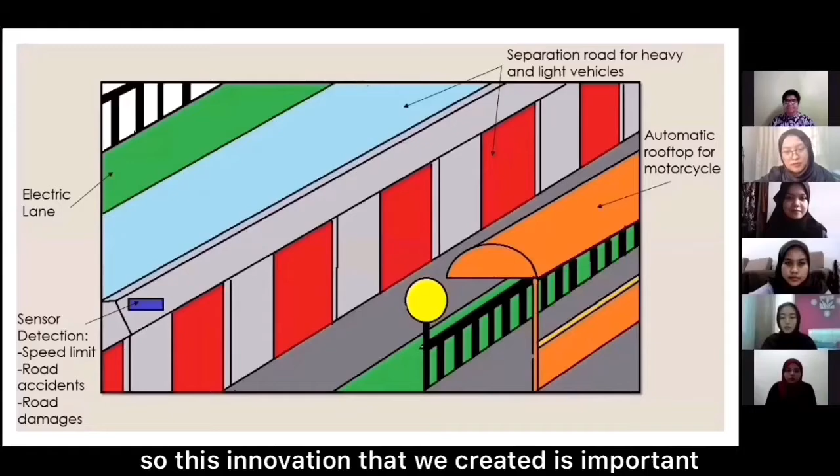Next I'm going to share the slideshow we have made for the innovation, the Innovative Technological Highway System, ITHS. This innovation is important for the future of mobility in Malaysia, focusing on improvement for the highway system.

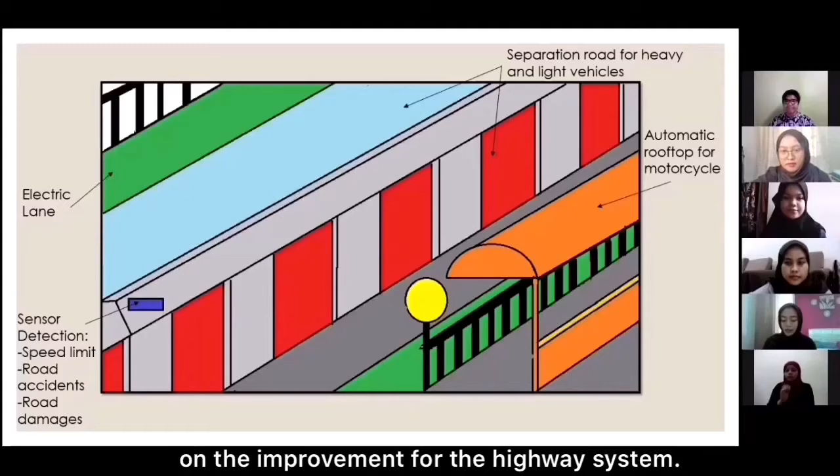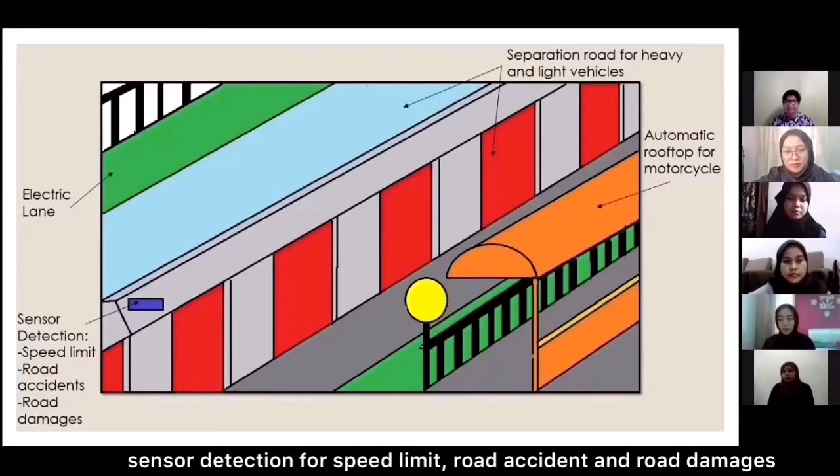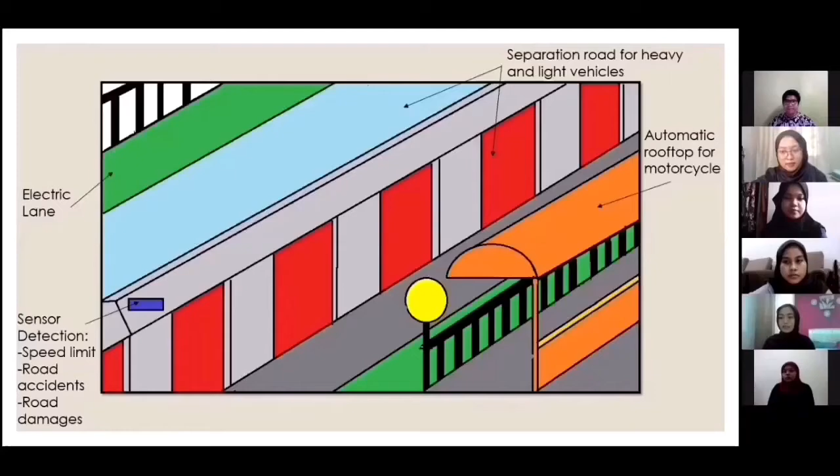We made improvements and innovations in the highway system. There are 6 parts of the highway system that we focused on for the innovation: electric lane, sensor detection for speed limit, road accident and road damage detection, automatic rooftop for motorcycles, and separation lane for heavy and light vehicles. The electric car lane is a route where drivers can charge their car while on their way to their destination.

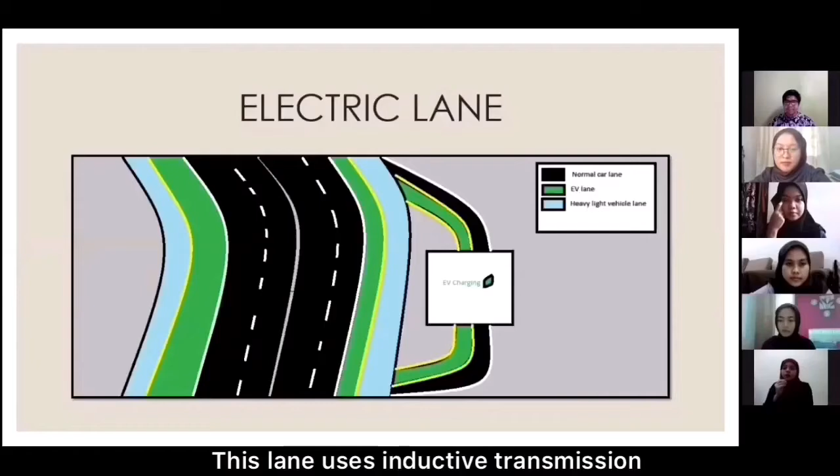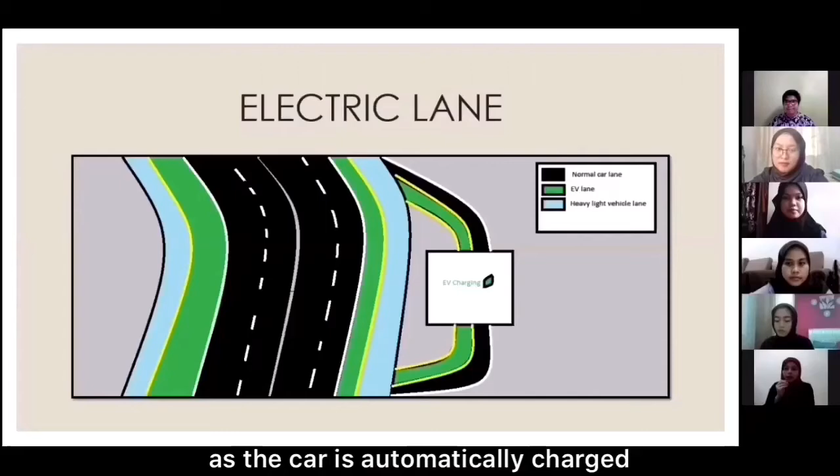This lane uses electric power from an electrical substation, which is part of an electrical generation, transmission, and distribution system. The lane uses inductive transmission to transfer power from the lane to the car. The benefit is that electric cars can travel long journeys as they are automatically charged while on this lane.

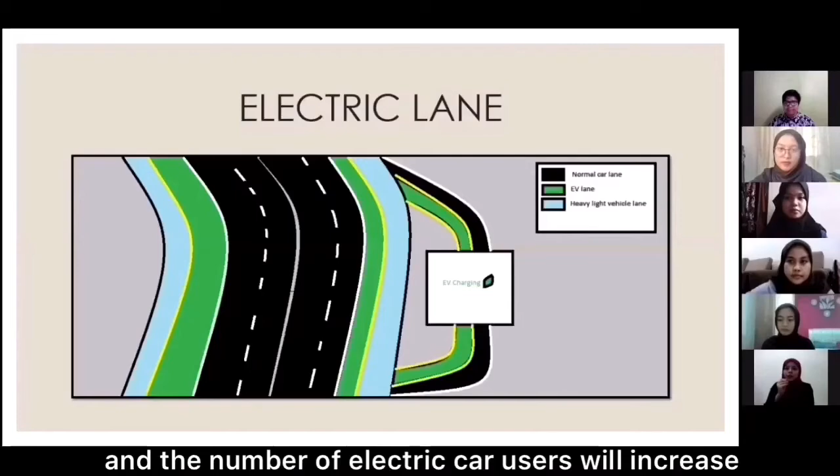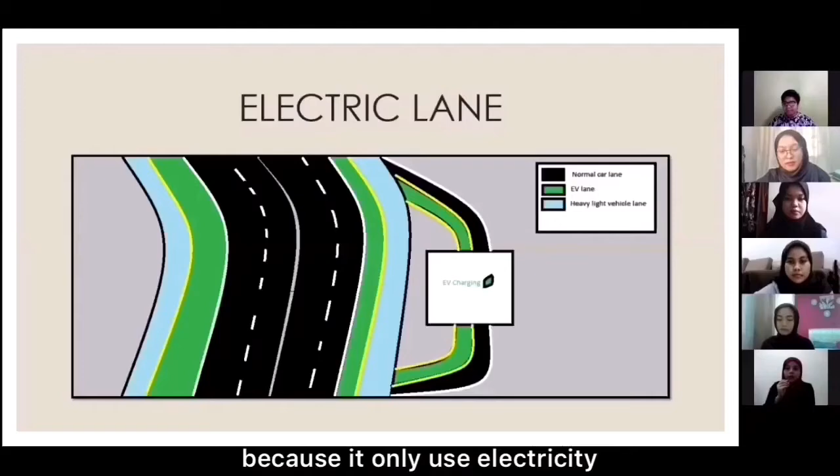Malaysia is getting more and more advanced, with more electric cars being produced and more electric car users in the future. This can reduce air pollution since electric cars don't emit carbon dioxide like petrol cars, only using electricity. This clears the air pollution so people can breathe fresh air, giving a big impact to society.

Another function of the Innovative Technological Highway System is the road sensor. This sensor is planted inside the road layer, placed in the middle of the wearing course layer and the binder course layer. There are 3 main purposes for this sensor, the first being the speed limit trap.

If a vehicle is driving fast, the road sensor will create a warning sound in the vehicle. At first it sounds slower, and if the vehicle keeps speeding, the warning sound gets louder and louder, producing a beep as a warning. This sensor operates by detecting vibration, impact, and friction on the road surface. The advantages of the speed limit trap are reducing vehicle speed, reducing accident rates, and increasing road user awareness that speeding is dangerous.

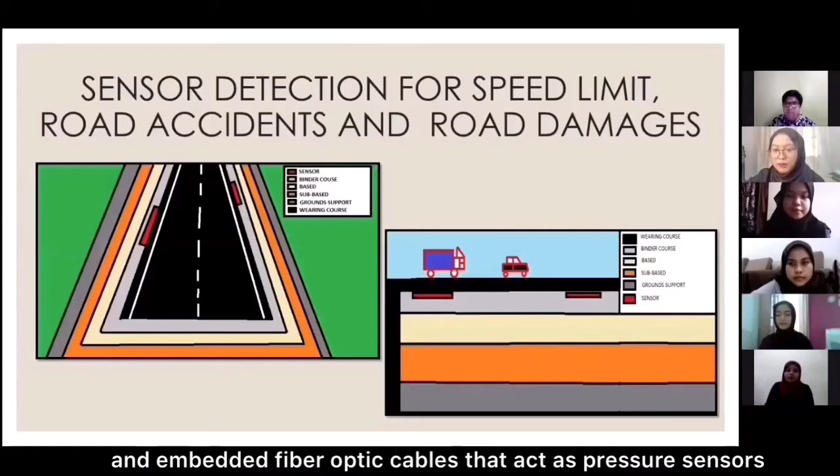Next is the emergency detector. This is a highway studded with sensors that monitor wear and tear and feel vehicles like a finger on a touchpad, connected to the internet, which automatically summons help when an accident occurs. It can detect when and where an accident happened and automatically send an alert to emergency services to help the victim. This detector is covered with factory-made concrete, featuring Wi-Fi connectivity and embedded fiber optic cables that act as a pressure sensor.

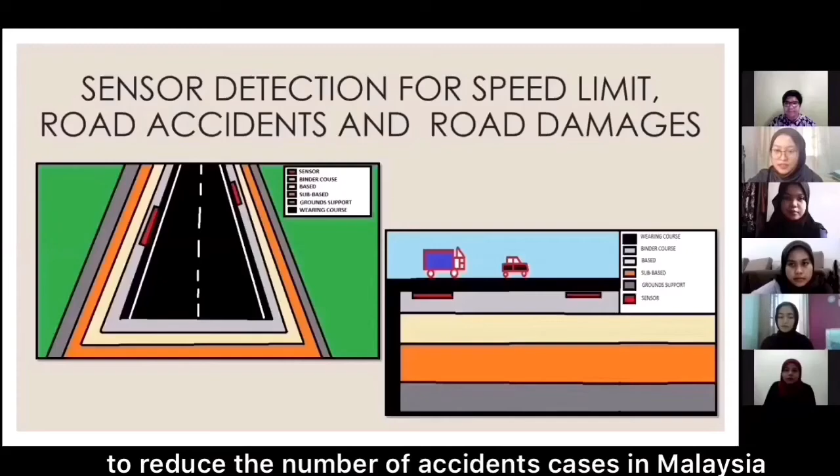Although the price is a bit too expensive, it is very useful, especially for reducing the number of accident cases in Malaysia. It can help emergency services like police, fire and rescue, or ambulance detect accidents faster without waiting for a call from the public, as a person's life is precious and can be saved as quickly as possible.

Malaysia also suffers from aging roads with much road damage, which can lead to damaged tires, suspension, and more, especially dangerous for motorists. These sensors will be laid under the road surface to monitor road conditions, cracks, and the formation of potholes. At first level, the sensors can detect moisture and pressure, which can indicate problems are beginning to form.

If that continues, damage will occur. The sensor works and all information gathered can be sent periodically across a wide range. This sensor road brings a good benefit of detecting road faults before they happen, and ultimately helps motorists avoid traffic accidents due to damaged roads.

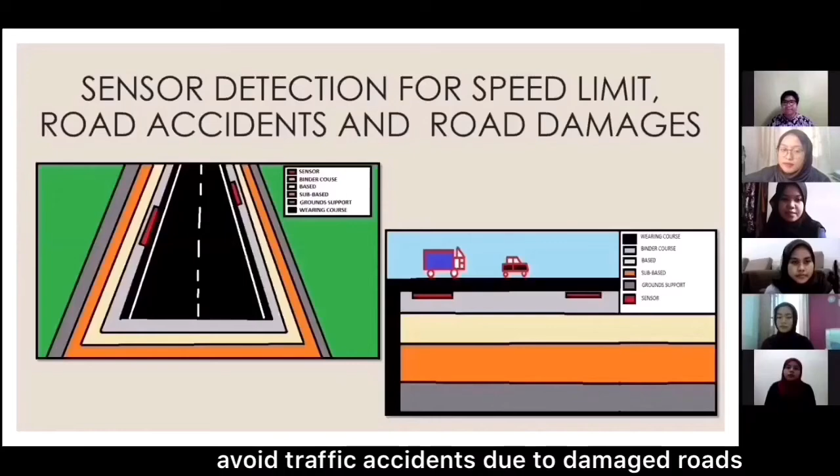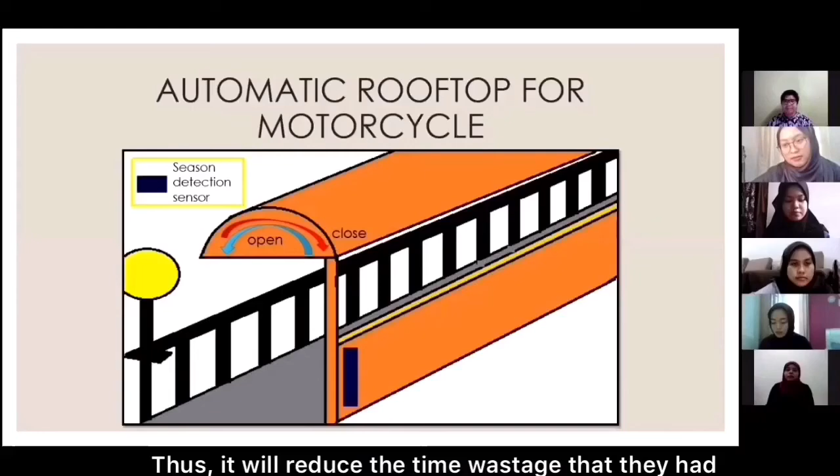Next, the innovation we made for the highway system is the automatic rooftop for motorcycles. This system helps motorcyclists ride during the raining season, so they don't have to wait under a bridge for the rain to stop, reducing the time wasted waiting.

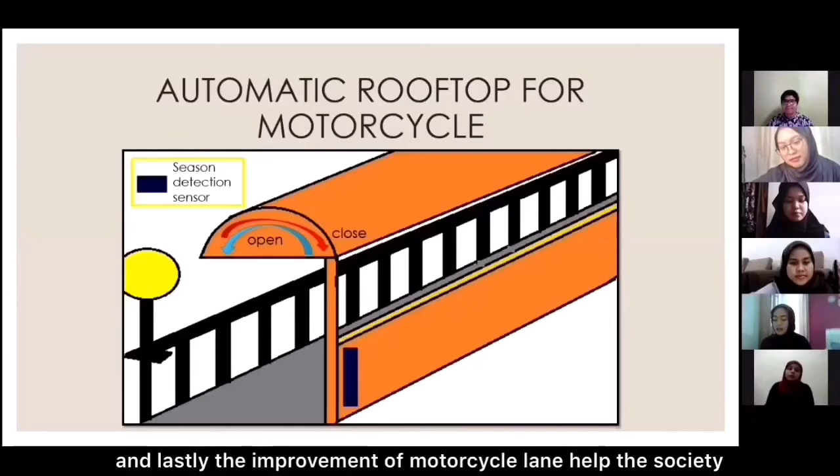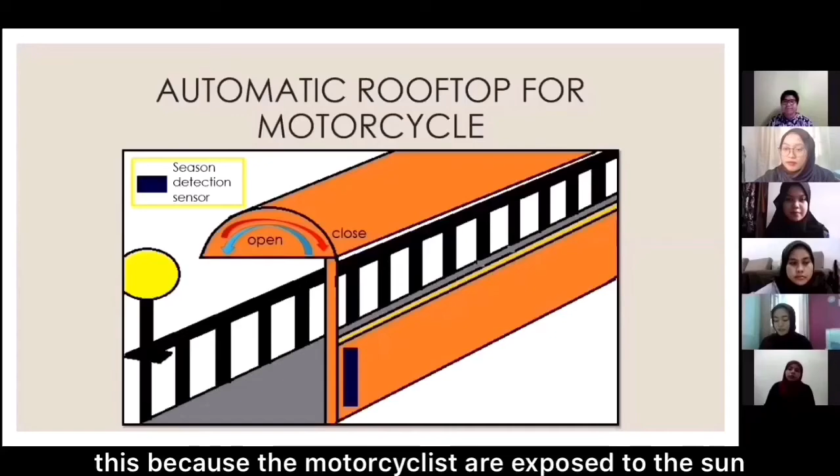It also helps reduce accidents due to slippery roads. Lastly, the improved motorcycle lane helps society by preventing skin radiation exposure, which could lead to skin cancer, since motorcyclists are exposed to the sun.

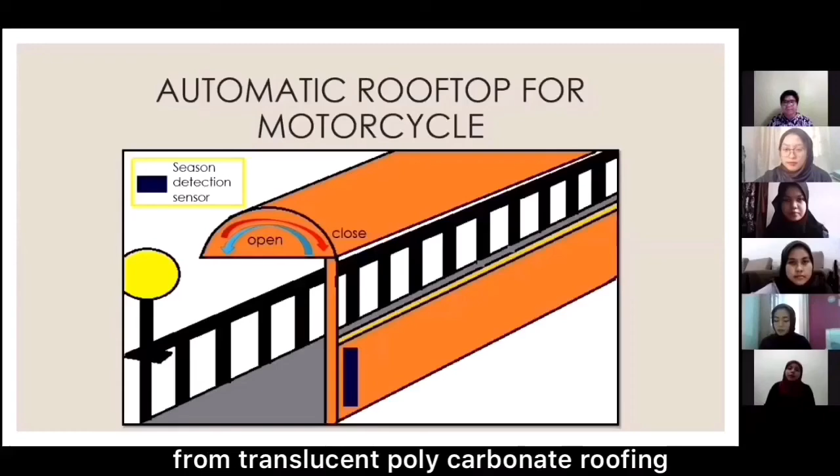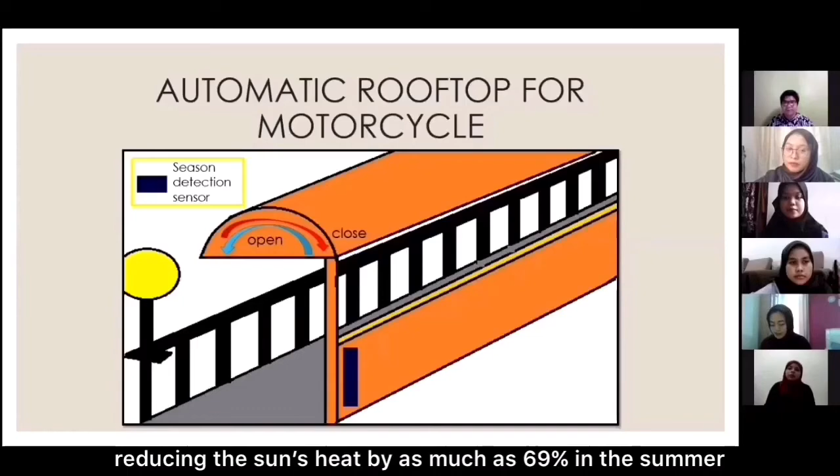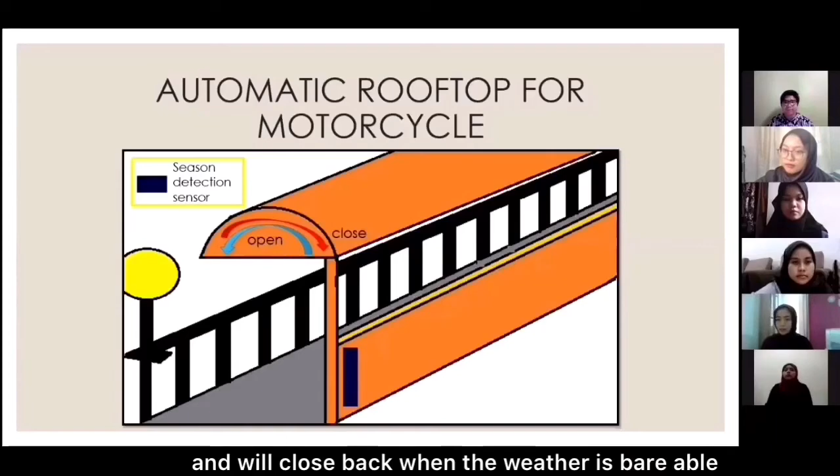So how does the system work? The rooftop will be made from translucent polycarbonate roofing. This material reduces UV radiation and has amazing thermal qualities, reducing the sun's heat by as much as 69% in summer. The rooftop is installed with a sensor that senses the weather to open and close automatically, opening when it is raining or sunny, and closing back when the weather is bearable for motorcyclists to ride on the highway.

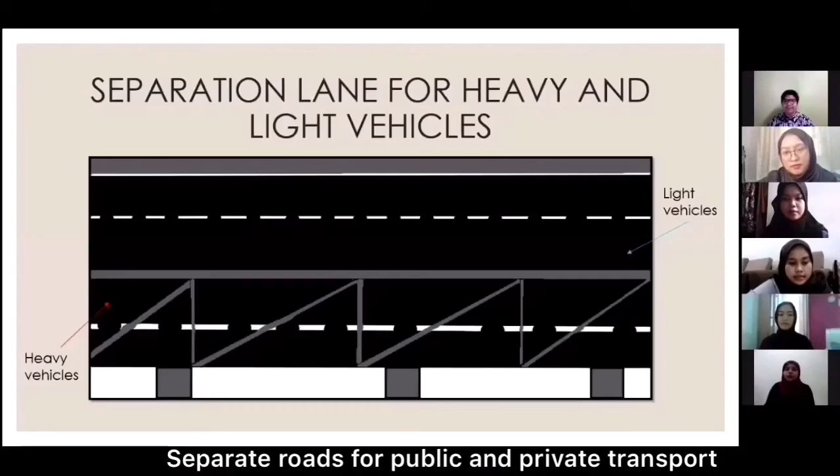Next is the separation lane for heavy and light vehicles. Separate roads for public and private transport are divided by two levels of a bridge, but still lead to the same destination.

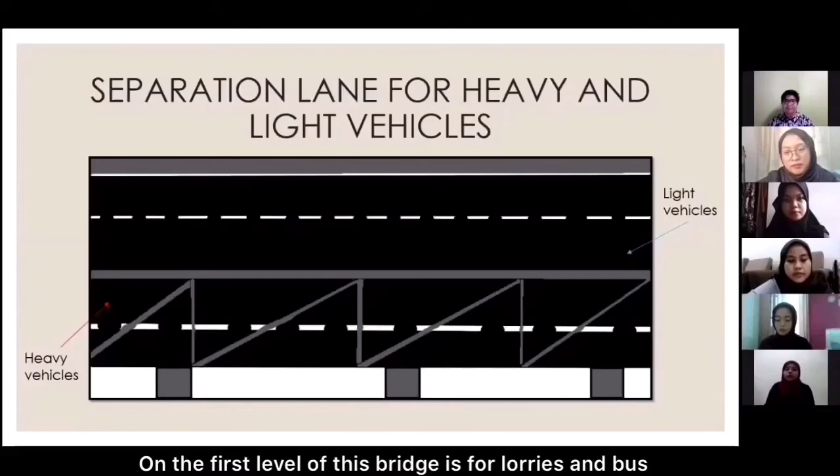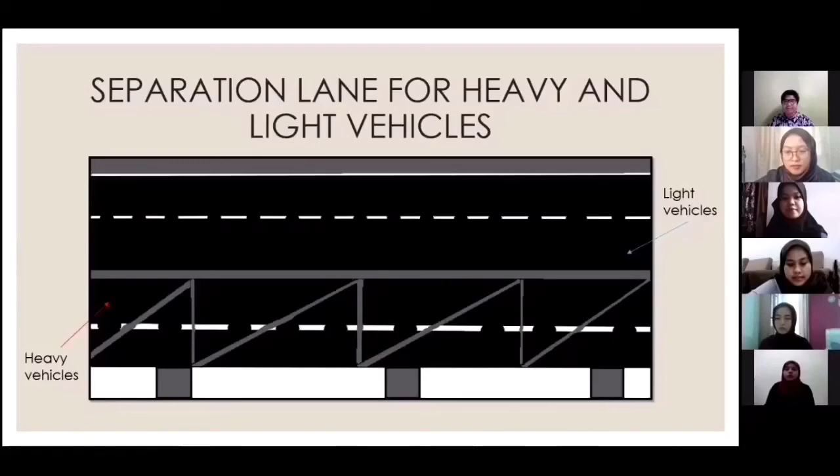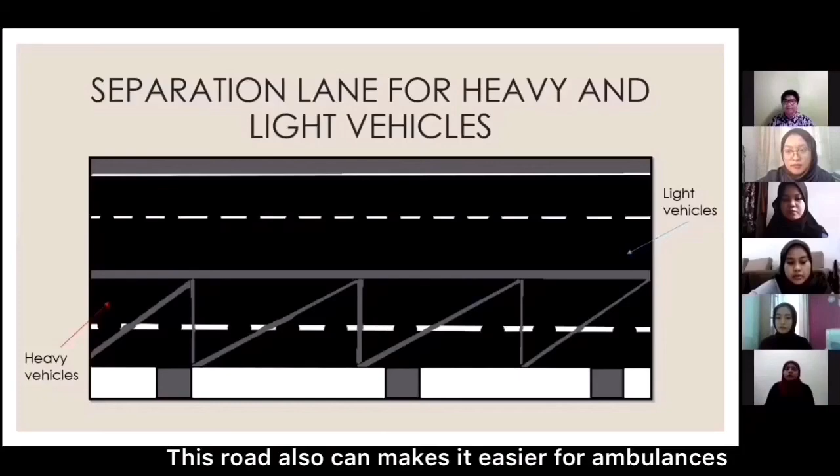This bridge is very strong because it uses materials such as steel and concrete. The first level is for lorries and buses, and the upper, second level is for cars and motorcycles. The benefit of this bridge is to reduce the risk of accidents between cars and motorcycles, and between lorries and buses. It also helps reduce traffic congestion, and makes it easier for ambulances to reach the hospital quickly.

In conclusion, this innovation is an important change for the sector, paving the way for a brand new look at roads, a new perspective on decades-old practice, and new ways to tackle old problems. That is what will make the next 10 years in the highway industry so exciting, bringing new technology the world has never seen before, with thousands of new innovations still in their seedling stages of development.